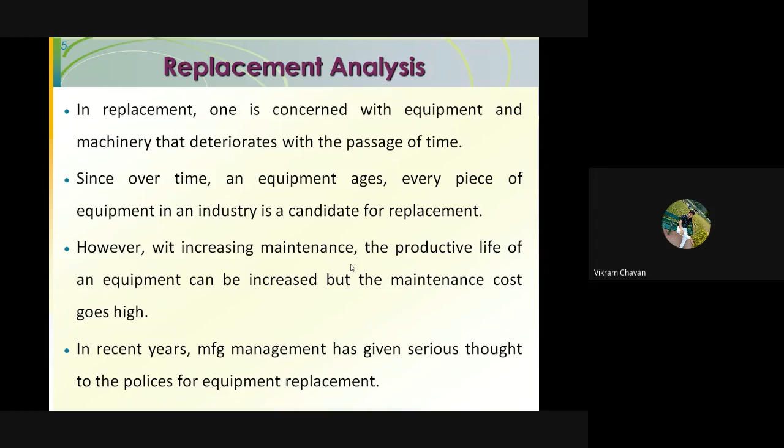Mainly two policies are followed in relation to this particular replacement analysis. One is individual replacement policy, and the second one is group replacement policy. So in individual replacement policy, one can say that if one machine gets a breakdown, immediately replace that particular machine. That is nothing but individual replacement policy.

And in a group replacement policy, after some time period, if you consider that after 10 years, all the machines are replaced from the industry, okay, to cope up with the new technology and to cope up with the market demand, all the machines or all the equipments from the industries are replaced. That is nothing but group replacement policy.

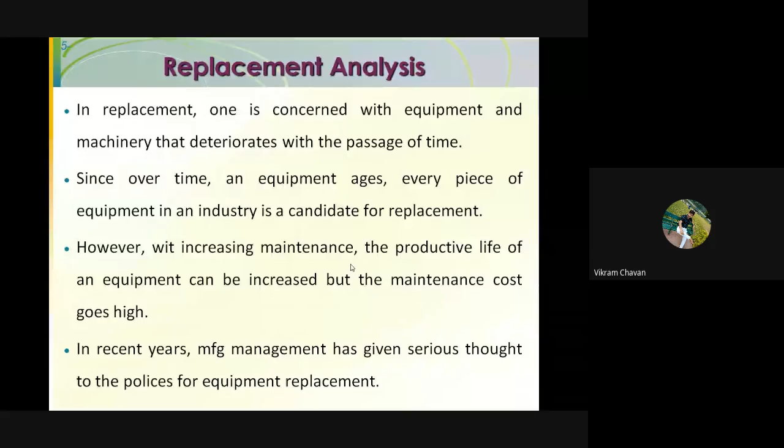Okay, shall we move ahead to the next slide? Or if you require some more time, then you can mention in the chat box. If you have finished with these slides, then we will move to the next slide. Shall we move ahead? Okay.

So next point is reason for replacement. First reason is deterioration. So deterioration means what? The decline in performance due to wear and tear or misalignment. So how can one say that the machine is deteriorating? The first criteria to understand this particular deterioration is nothing but increase in maintenance.

Okay, then the quality of the product gets reduced. Then the cost required to produce that particular product, that is nothing but labor cost. One can say that the labor cost to produce that particular product gets increased. That is nothing but increasing labor cost. And the loss in operation time.

Okay, so time required to produce this particular component. So that is nothing but what? The increasing lead time. Time required to produce that component on that particular machine gets increased. Okay, so that is nothing but operation time.

So initially when you purchase that particular machine, this operation time is very less, and after some time period, due to the breakdown, due to the failure, and due to the deterioration of that particular machine, the time required to produce the same components will get increased. Okay, so loss of operation time due to breakdown.

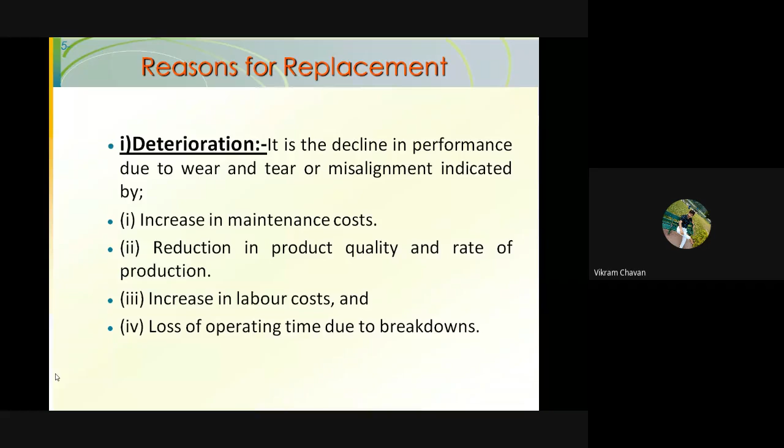Okay. So the next reason for the replacement is nothing but obsolescence. That is nothing but what? Requirement to change. Obsolescence is requirement to change. So if the machine is outdated, or the technology is outdated, in that case, the company needs to think about the change of machine or replacement of machine.

In case the demand of the customer changes, or some changes in the product are required according to the demand of the customer, in that case, the technology of the production should be updated. So for that purpose, the replacement analysis should be carried out over the old machine or over the old technology. So in case of obsolescence, one has to think about the replacement of the equipment or replacement of the machines.

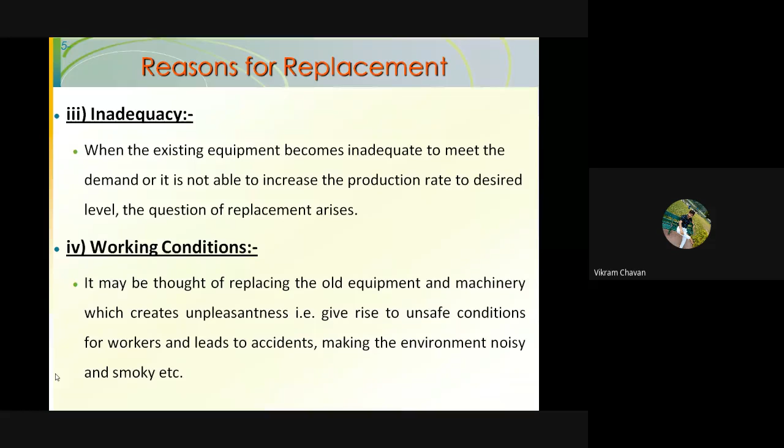Okay, next one is economy. The existing unit or equipment has outlived, meaning the lifespan of that particular equipment or machinery is over, their effective life, and it is not economical to continue with them. So the lifespan of that equipment is over, the equipment deteriorates, and then it has maintenance problems. So the economy related to that particular equipment needs to be considered.

And the cost analysis should be carried out related to the equipment. That is, whether that equipment creates profit for the company, or we can say the benefit-cost ratio related to the equipment, whether we are getting the benefit from that particular equipment or we are not. So on that basis, one can have the replacement policy related to the machinery or the equipment.

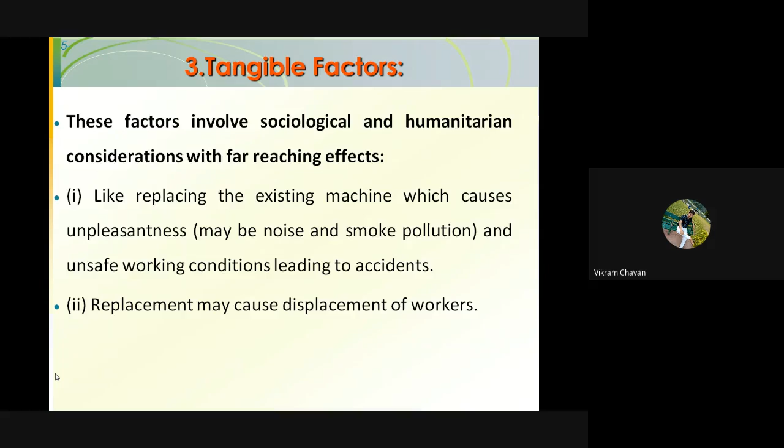Getting everyone, what are the factors, financial or cost factors or technical factors, to consider while dealing with the replacement of any machine or any equipment or any facility in the industry? Getting everyone this particular point? Please mention in the chat box. If you have any question, you can ask, and note down the points related to the technical factor.

Okay. So first of all, note down factors to be considered for replacing equipment. Which are those factors? First one is the technical factors, second one is the financial factor, and third one is the tangible factors. Okay, please note down. If you have any question, you can ask in the chat box, or you can unmute yourself and ask. No problem.

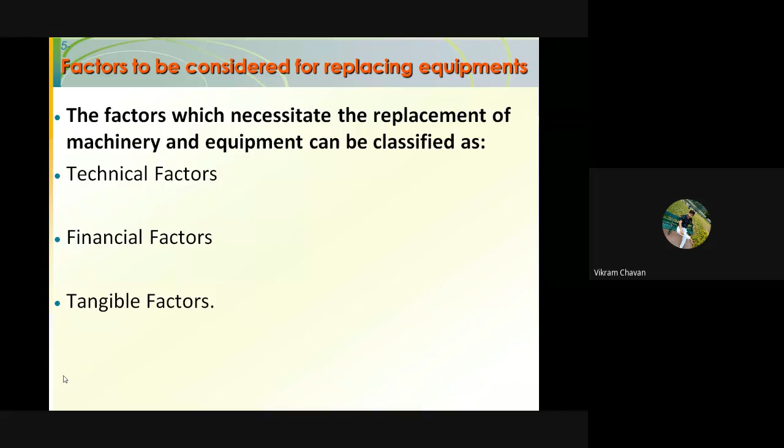Shall we move ahead to the next slide? Have you written from this slide? Ruturaj Safkar, are you getting the point? Sanket Boramanikar, Sanket Sansare. Okay. So the technical factor. Please note down the points related to the technical factor.

So this chapter is over here only. Tomorrow we will conduct the quiz test on this particular chapter number 3. We have covered all the points from this chapter. Okay, shall we move ahead to the next slide? Please note down the points, it will be useful to revise the chapter and to understand the points. Shall we move ahead to the next slide?

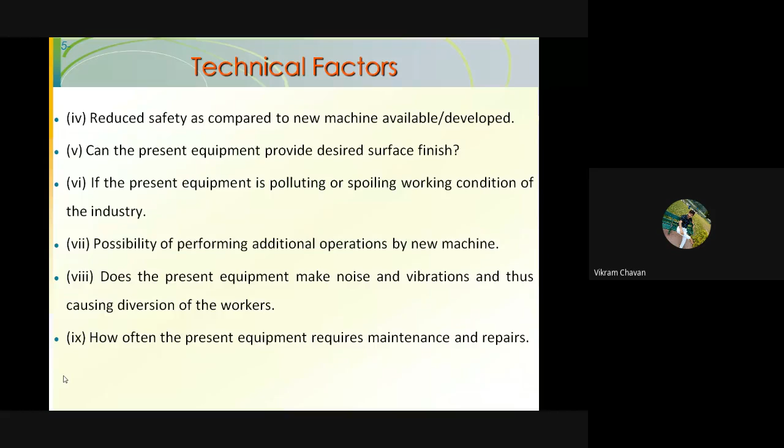Then second one, financial or cost factor. Financial factors: high repair and maintenance cost, possibility of combination of some operations resulting in increase in productivity. Then the initial cost, the salvage value of the existing equipment and the challenger at the end of useful life.